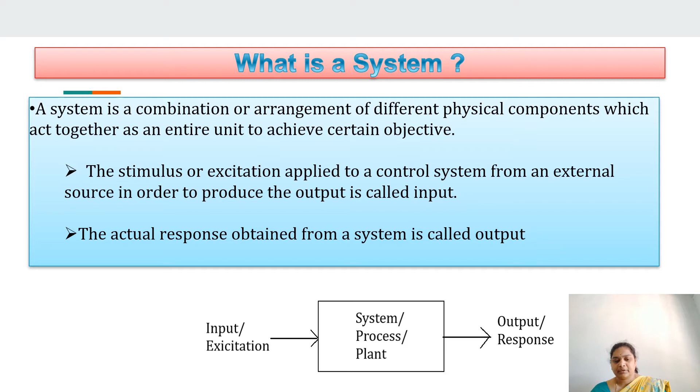Now let us see an example in order to understand the system. So the simple example I have considered in order to understand a system is a fan.

So here the fan is the system to which you give an input of 230 volts AC supply of frequency 50 Hz. To the given input, the system will react, that is the fan will react and produce an output which is nothing but the airflow.

So to the given applied supply, it will produce some amount of airflow which depends upon the speed of rotation of the fan. The more speed with which it rotates, the more airflow you will get.

Now if you observe the output of a system, this is the output of the system, which is nothing but the airflow. Since the input is fixed at 230 volts, the speed with which the fan rotates is also fixed, meaning the amount of airflow is also fixed.

So for this type of system, you don't have control over the output, meaning you are not able to control the amount of airflow. You are not able to either increase the airflow or decrease the airflow. So here you don't have control over the output of a system.

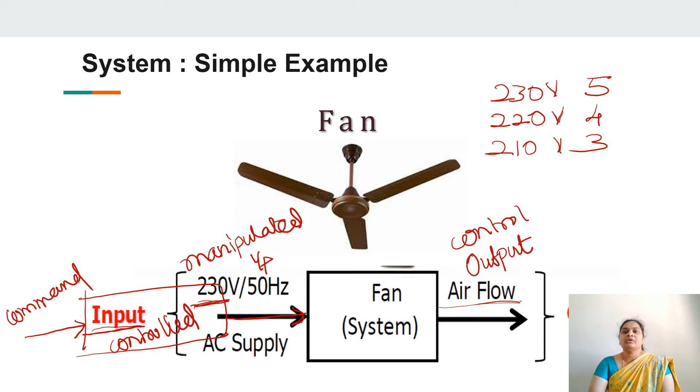We give this manipulated input with the help of a controller. So depending on the requirement or the command given by you, the controller will follow and produce an output. It will produce an output such that it follows our command. We give a command to the controller, and the controller will act according to your command and produce a manipulated input to the system, such that the output will follow your command. Now you are able to control the output of the system according to your command.

We call such systems control systems. So whenever you are able to control the output of a system by applying some command, we call it a control system. A control system consists of two blocks. One is the controller, which follows your command and generates an output, and that output is nothing but the manipulated input to the system. To the manipulated input, the system will react and produce a desired output, meaning what is needed by you, meaning it will work according to your command, meaning you are able to control the output of a system. So it consists of two blocks.

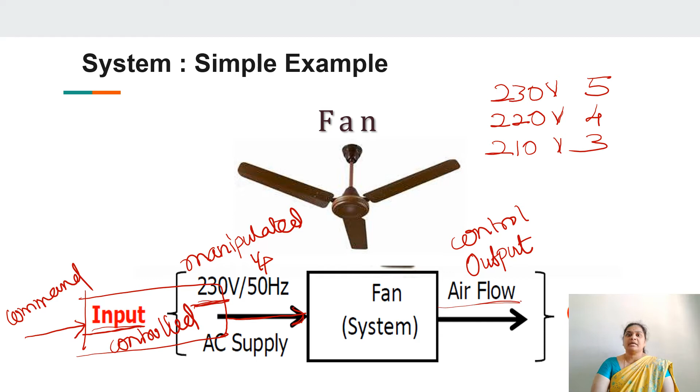One is the controller, which commands the system, and the system itself. So a controller along with the system, by which you are able to control the output according to your requirements, we call it a control system. We can define control as a means to regulate, direct, or command a system so that the desired objective is attained. Control is nothing but a command given to a system in order to obtain a desired output from the system. So a controller along with a system will form a control system.

So a system along with a controller will form the control system. A control system can be defined as an arrangement of different physical elements connected in such a manner so as to regulate, direct, or command itself or some other system. If you are able to control the output of a system, then you will call that system a control system. So it consists of two blocks: one is the controller, the other is the process, plant, or system.

So instead of giving the direct input to the system, we give a manipulated input, or processed input, to the system. To the processed input, the system will react and produce an output. The output produced here is the desired output, meaning the output which you require, and it will act according to your command. So the command you apply to a controller, the controller will follow your command and produce an output. We call this the controller output, which is the input to the process. The input to the process is nothing but the manipulated input. Accordingly, you will get the desired output.

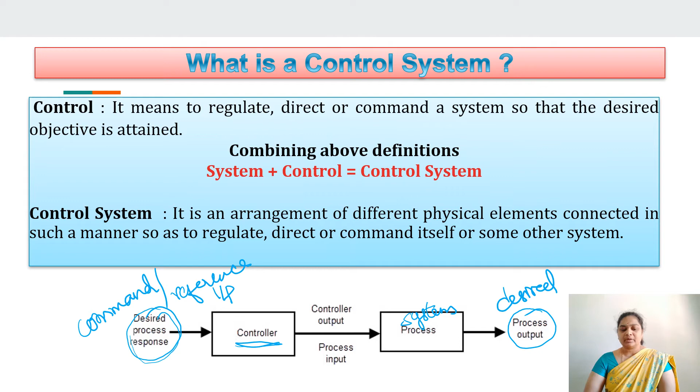Okay, so this is the simple block diagram of the control system. Now we will try to understand more with the help of an example.

For simplicity, I have considered the same example, that is the fan, in order to understand the control system. You can convert this simple fan, that is nothing but a system, to a control system by the addition of the controller. Here the controller for the system is nothing but the regulator. So a regulator along with fan may be considered to be a control system. The regulator will act like a controller, and the fan is the system. So regulator is the controller and fan is the system.

So the output of the regulator will be such a way that you are going to get the desired output from the system, and you give the command to the controller. The controller will have complete knowledge about the system parameters, and it will produce the output such a way that the reaction of the system to the controller output will be according to your command, meaning it will follow the command.

For example, I have given a command to the regulator to rotate at a speed of number 4. So I apply the command to be number 4. When I apply this command to the controller, it will produce a voltage such a way that the fan will rotate at the speed of 4. As I have considered, while designing, when you apply a voltage of 220 volts, the fan will rotate at speed number 4. If I give 230 volts supply, the fan will rotate at speed number 5, high speed.

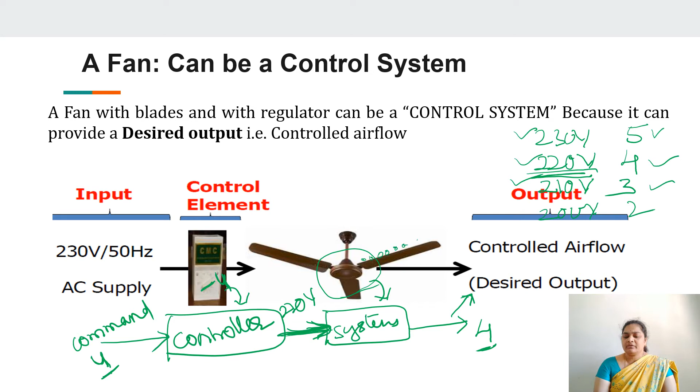When dust accumulates on the blades of the fan, the speed of the fan may get reduced. So you have given a command for the fan to rotate at speed number 4. The controller has complete knowledge of the system and will generate a voltage of 220 volts and give it as an input to the fan.

So for the applied 220 volts, it has to rotate at speed 4. But what happens here? Due to the accumulation of dust particles on the fan blades, it will not rotate at speed 4. It will rotate at a lesser speed than you have given. So the desired value is to rotate at speed 4, but it does not, due to accumulation of dust particles on the fan blades.

Or otherwise, after some prolonged use, there might be some rusting inside the fan motor. So the windings got rusted. But the controller doesn't have knowledge of this rusting of the fan windings. While designing, the controller knows that if you give this much voltage, it will rotate at this speed. But after usage, what happens?

The fan motor got rusted. So even though the controller follows your command and gives 220 volts to the fan, it does not rotate at speed 4. This means you are not able to control the output. You are not getting the desired output from the fan due to the ignorance present in the controller. The controller does not know what happened to the system.

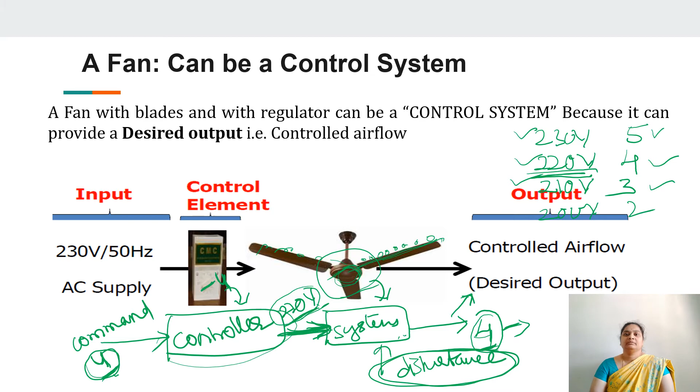So this is the block diagram with the disturbance. The unwanted signal that affects the system is called disturbance. The disturbance may be created inside the system itself, or it may be created externally. We classify them as internal disturbance or external disturbance. Even though it is internal or external disturbance, we will represent this disturbance externally, like this.

So now our objective is, whenever a disturbance is present inside the system and affects the system parameters, the controller is ignorant about that and will act according to the design made previously when it was manufactured. So when it acts like that, you will not get the desired output here. This means you are not able to control the output of a system according to your requirements, according to your command. This is the problem with this structure.

To overcome this problem, what we will do is give feedback to the given structure. Feedback means you will use a sensor in order to measure the output. So a sensor will measure the output, and this output is given as feedback to the input.

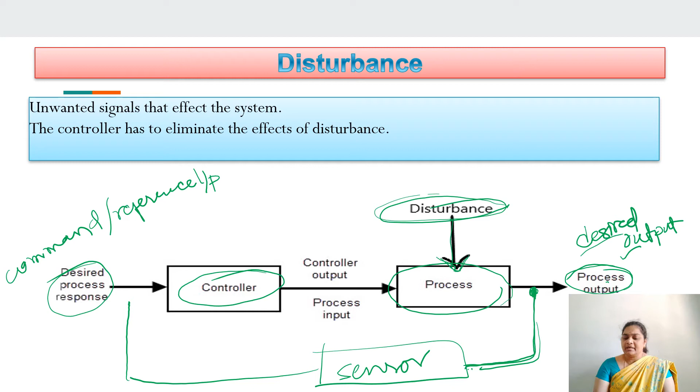It may be desired or it may not be desired. It will sense the actual output of the system and feed it back to the input. So at the input you will have a detector, called an error detector, which detects the difference between the actual output produced by the system and the output you desire. The desired output means the reference input is given such that you get the desired output. So it will compare the reference input with the actual output of the system and produce an error.

Now the controller is not controlled by the reference input. The controller is controlled by the error between the reference input and the actual output of the system. This error will act in such a way that it makes the controller produce an output, which is nothing but the input to the system.

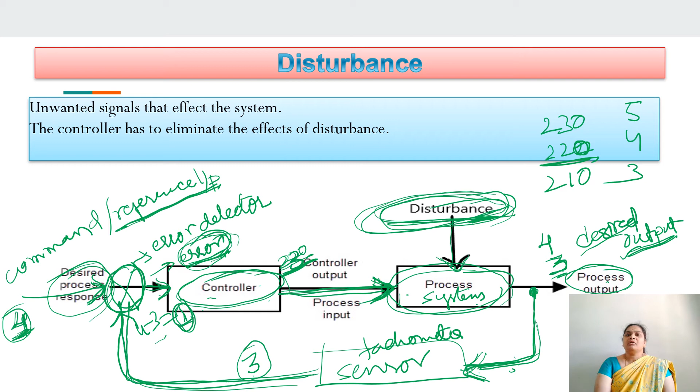So this is the structure of the control system with feedback.

So here you apply the reference input, or you can call it a command, so that you get the desired output from the system. When you apply this, due to the presence of disturbance inside or external to the system, according to our command, the controller will produce some output. We call it actuating signal or manipulated signal or controlled signal. This produced output from the controller will be input to the system or plant, to which it reacts and tries to produce the output. Now if there is no disturbance, no problem. The controller is designed without disturbance, so when you give the reference input, it will produce the desired output.

But in the presence of disturbance, the parameters of the system will get changed. So as the parameters change, the controller is ignorant about it and is not able to produce the desired output according to your command.

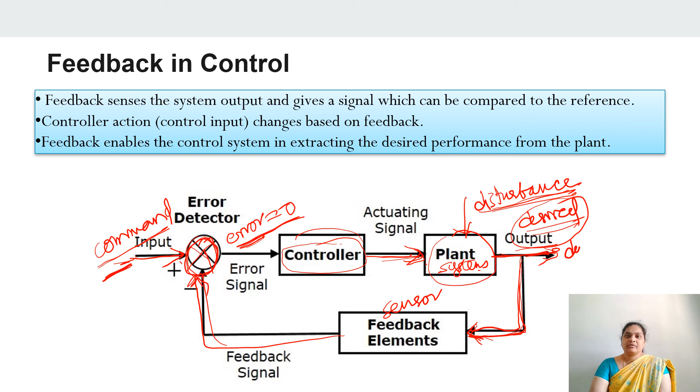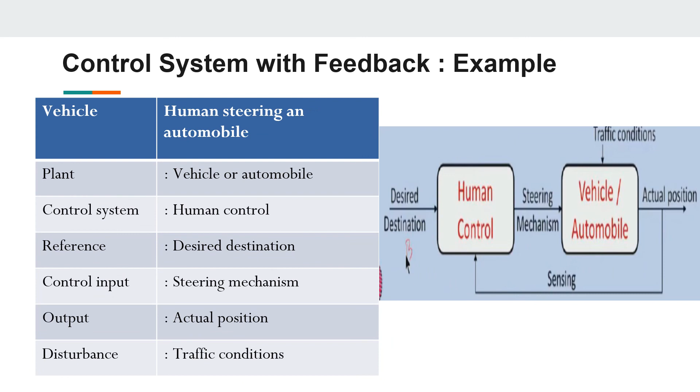According to the literature, you can classify control systems into two types. If the system has only a controller along with the system, we call it an open loop control system. This type of system is not able to overcome the disturbance created inside the system, whether internal or external. It is not able to take care of the disturbance.

To overcome this problem, we go for feedback. With the help of feedback, you are able to obtain the desired output in the presence of disturbance. We call this type of system a closed loop control system, or a control system with feedback.

So we have now classified control systems into two types. One is open loop control system, which has just a controller and a system. The output of the controller will be given as an input to the system. According to that input, the system will react and try to produce the desired output. The controller will follow your command and produce an output which is the input to the system, so that you will get the desired output.